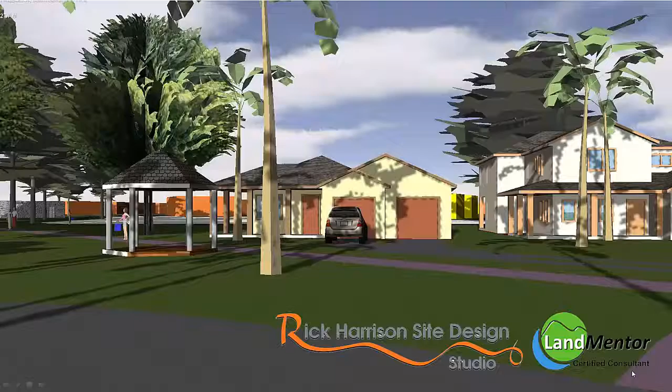In the next 20 minutes, we're going to introduce to you an entirely new way to look at residential land development called Prefurbia. When we look at sustainable development, we look at economics, how we can raise value, lower construction costs, lower ongoing maintenance.

And then we look at the human factors. It's great if everybody could live in a gentrified, expensive neighborhood, but how can we create self-worth at the lower or middle income levels so that every time you come into your development you feel great about yourself?

And of course, reducing environmental impacts are important, but not at the expense of profitability, because if a developer goes broke trying to be environmentally responsible, it will not be repeated in the industry. And that's why over 20 years you see very little of it. A balanced approach is what will give sustainable growth.

So how do we accomplish that when the world is developed like this? We have to understand why the world is developed with almost no design sense. We can look at the zoning requirements. All we have is a set of minimums, and maybe we've thrown in a few of the maximums. So there's a set of rules, paint by numbers, on how we develop the land that we have today.

Meanwhile, the developer always gets the blame for the cookie-cutter development, and yet the developer never designs the site. It's the consultants who do this work by following the city's rules.

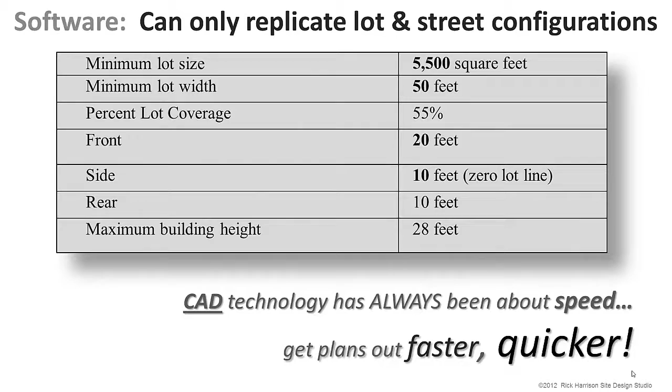So you got to ask yourself, with all this power today, why do we still design like this? Why do professional consultants who get paid heavily to design our neighborhoods still do work like this? And that's because they're using software that's been designed only about speed. It's been taking these minimums and how fast can we get that development out. Software has always been packaged and marketed to go faster, not better.

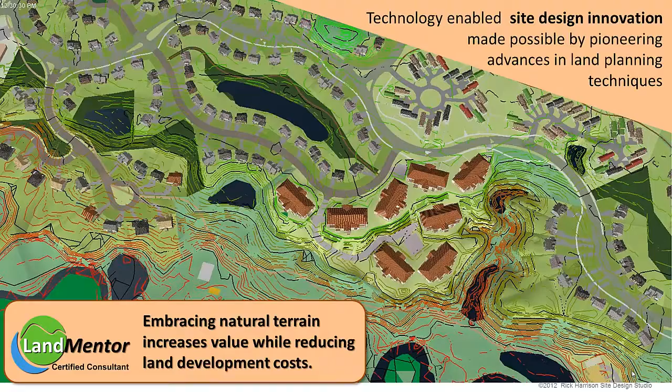Following a set of minimums encourages a tight grid. Natural terrain is never a tight grid. It's free form. So we've created a new era of design where we can embrace the natural terrain, create beautiful, wonderful neighborhoods that honor Mother Nature.

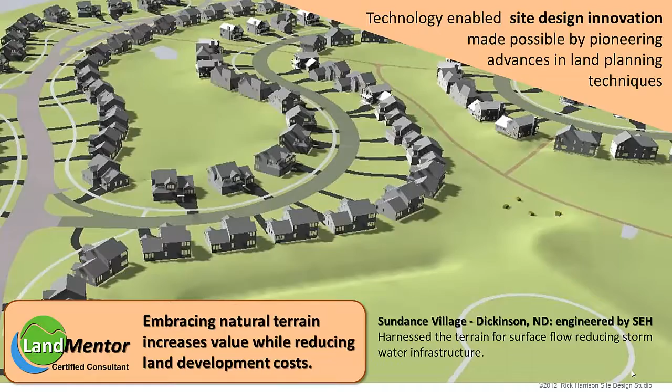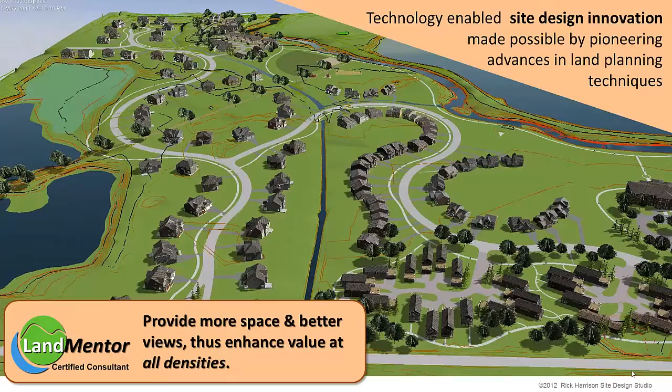Also, everybody wants a view, and hardly anybody wants to be packaged in a dense development. How do we provide a sense of space for everyone at every income so that every person feels important? Plus, what we represent on plan really should be exactly what was built. And that's rarely the case in land development.

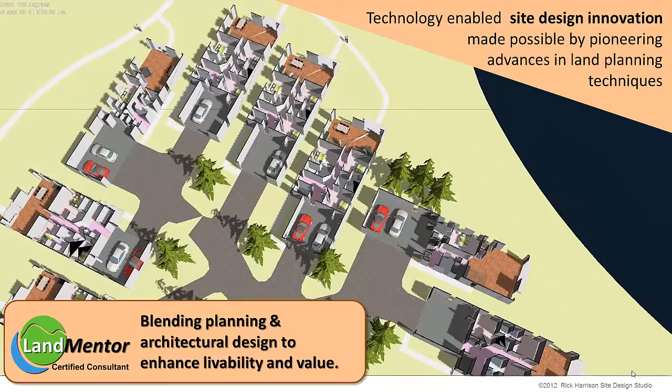An entirely new systems approach to how architecture relates to land planning is introduced in Prefurbia. This has a significant increase in value and livability that has not been duplicated before. It's a foundation for a new way to look at how homes, open space, and interior space relate to each other. And you'll see how that works soon.

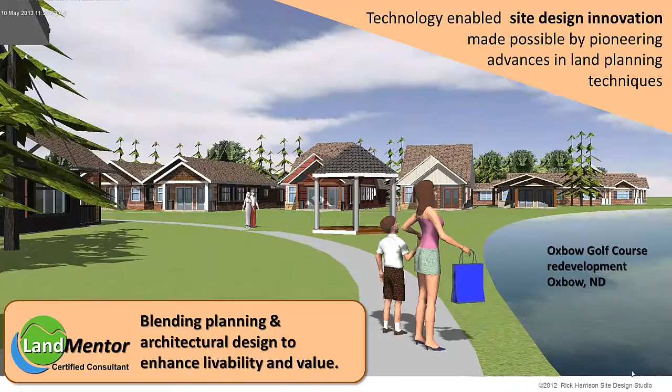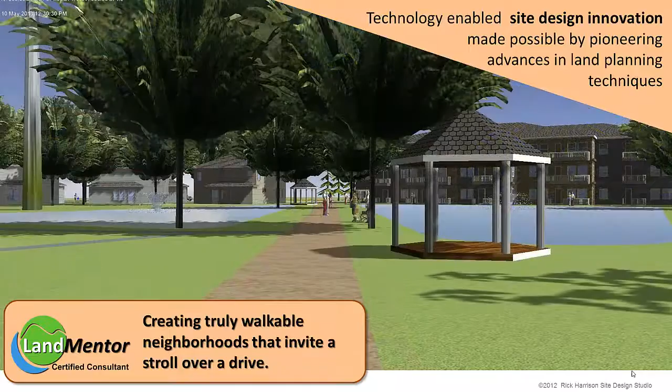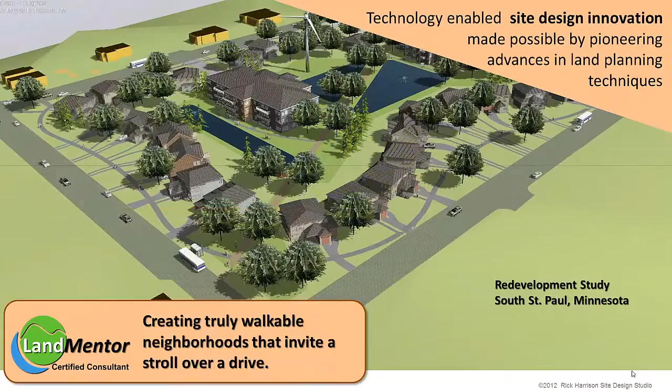Prefurbia also introduces new paradigms in walkability. In other words, we again look at a systems approach to create neighborhoods that invite a stroll over a drive. These systems can be used not just for new suburban development, but also, as shown here, urban redevelopment. Imagine neighborhoods that are so connected that you'll actually want to go out and make an experience for a stroll.

In Prefurbia, we've introduced vehicular flow. What does that mean? As you enter the neighborhood, we maintain a constant rate of speed, which significantly reduces both time and energy as one traverses the neighborhood.

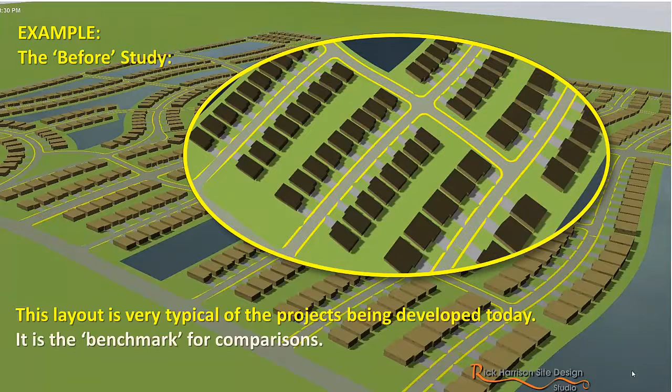Why should developers care about sustainable growth? Let's just take a look at one home in this 100 lot phase 1. The streets and lots will set a standard for centuries, even though homes might get remodeled. Average family is 3.5 people. So when we take a look at, say, 2 centuries, this 100 lot phase will affect almost 12,000 people. And yet, with all of our technology, this is what's very commonplace design in development throughout the U.S.

A grid development is wrongly thought to be pedestrian friendly. In this case, this gridded development, you have to get to that corner.

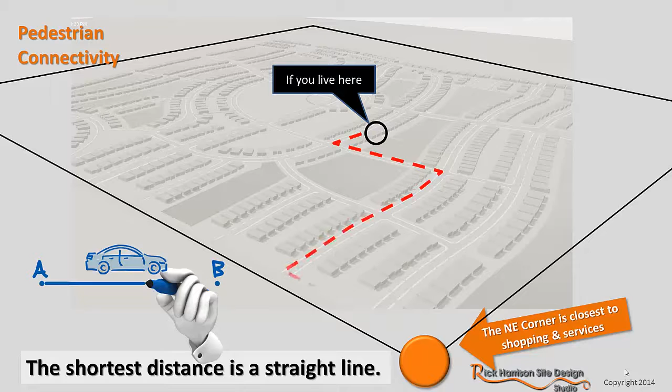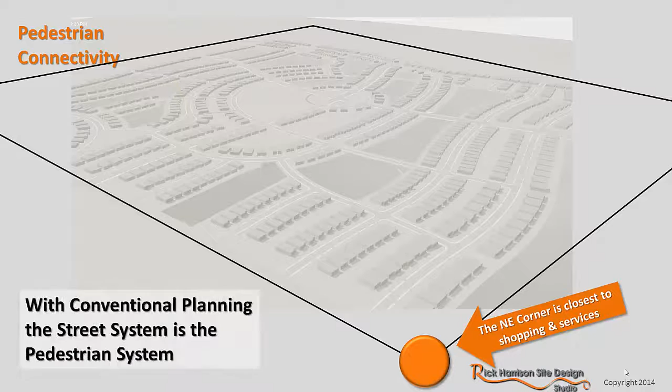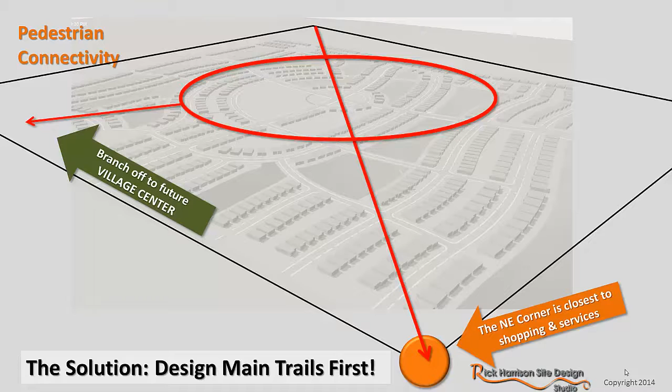So for most people, the grid provides the longest, not the shortest distance to get to your destination. Again, in Prefurbia, we use a systems approach. Instead of having the street system be the pedestrian system, we look for the destinations and design the pedestrian system first. The main trails come first in Prefurbia, and then we design around it—a much more logical approach to planning if we're going to create pedestrian-friendly neighborhoods.

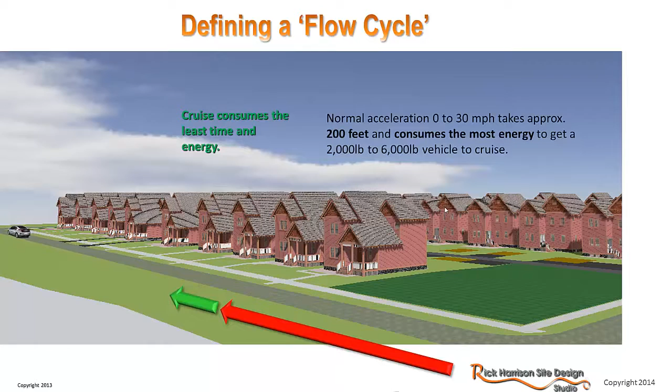Traffic engineering's done a great job on arterial streets and highways, but what about local streets? We started researching how much time and energy it actually takes a vehicle to get to residential speeds. It's 200 feet to get a car to that normal residential speed, where you're very efficient in time and energy, but then you're going to have to eventually come to a stop—that's another 200 feet. So a flow cycle is a minimum of 400 feet.

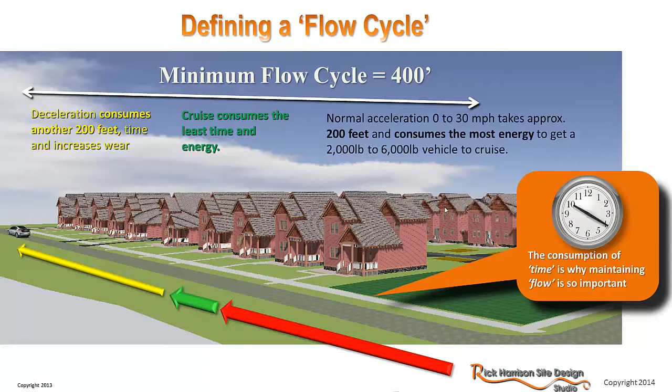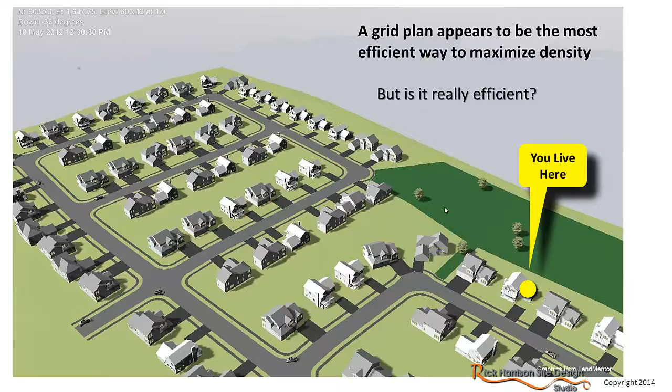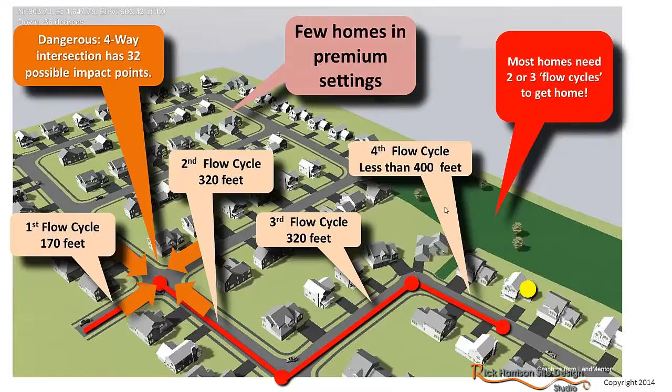This has a significant impact on both time and energy while in a neighborhood. To further demonstrate why this is important for every development being built, let's look at this development that was approved in 2010. It's assumed that the grid is very efficient. However, if you live in most of the homes in this neighborhood, you cannot turn a corner at 30 miles an hour, or even 25 miles an hour. It's in fact incredibly inefficient in both time and energy, and yet this plan provides very few premium settings for the builders and developers.

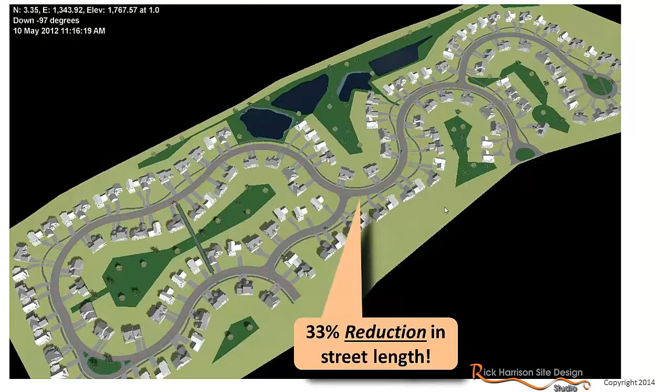As we redesign the same neighborhood, we're looking for one main street to define the neighborhood that maintains flow. There's a significant reduction in average time and energy that goes through this development compared to all other forms of planning. Perhaps just as, if not more important than the time and energy savings, is the fact that we've been able to reduce the street length by 33% while increasing the home premiums—yet it's the same density.

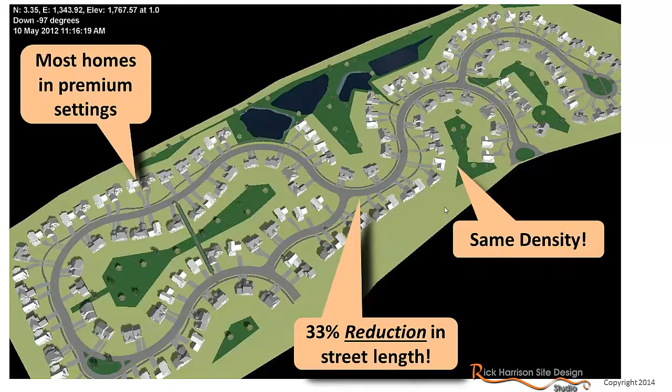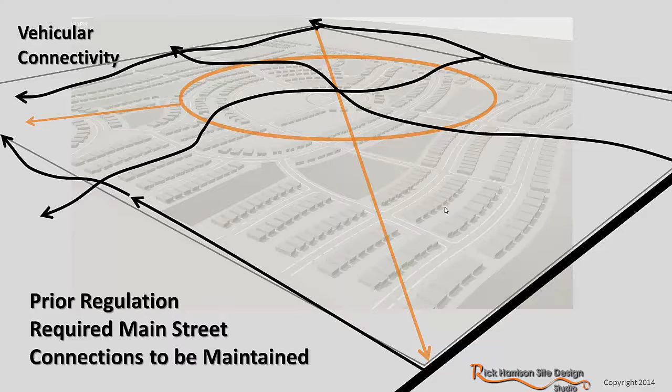So this is some of the things we're introducing that all tie together. Looking at the original grid plan, every one of those circles is a conflict point—not just for vehicles, but you're crossing pedestrians at every one of those intersections. The prior new urbanism regulations required us to bisect the neighborhood by having two main streets going through the design. This created 4 distinct separate neighborhoods.

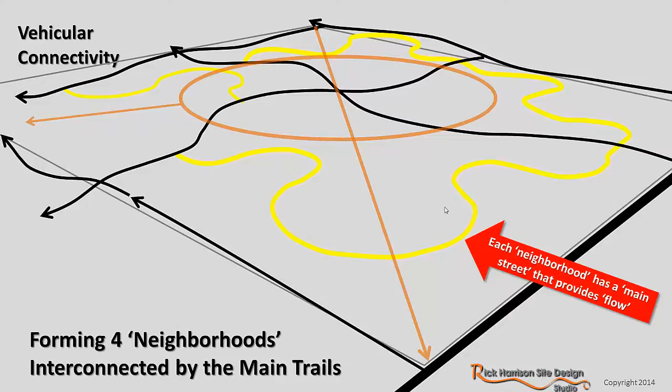However, the circular walk binds them all together. So with this concept of flow, once you enter one of these 4 neighborhoods, you maintain a good sense of flow. That is the foundation behind the planning of Prefurbia—that's how this plan and its logic have been developed. Those are big scale concepts. Now we're going to get into the fine details that we've been using on most of the 900 Prefurbia neighborhoods we've designed in the last 25 years.

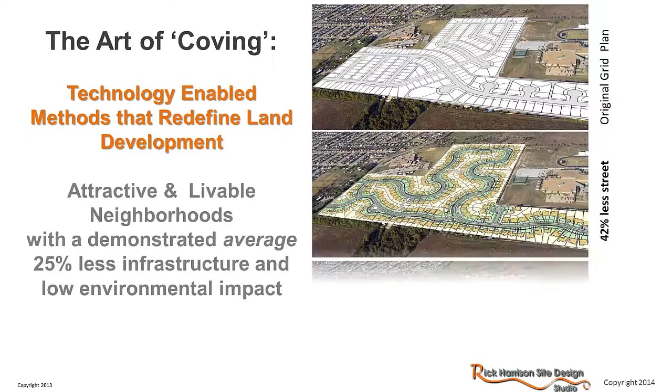We invented this technique called coving. Before coving, the engineer or surveyor laying out subdivisions would have to try and squeeze every lot into every little corner. Coving does something very unnatural—it pulls away from the boundaries. In this case, we're able to save 42% of the street and make 40% larger lots with 2 fewer lots, essentially the same density. And again, it's very important that what we represent on plan gets built identical to the way we're representing.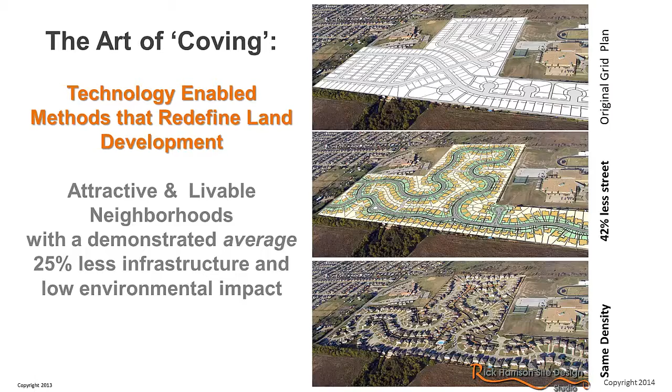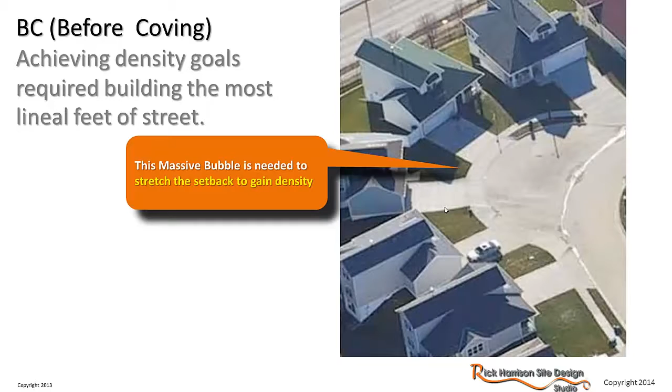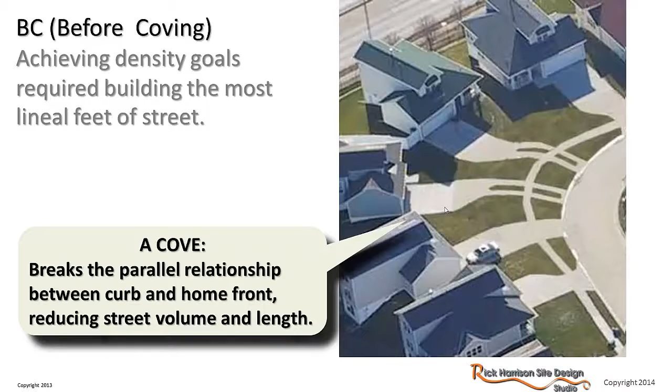A minimums approach is why those $40,000 bubbles are created. In order to stretch the setback line, you have to parallel that road because of the minimums. A 20-foot front yard minimum means we have to build that pavement, but the word minimum is key. We can go beyond the minimums, creating these little green open spaces—or large green open space in many cases—that we call a cove. That's the logic behind coving.

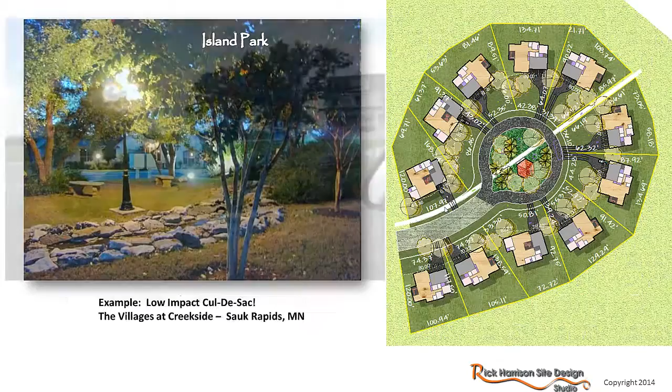Another example is in a cul-de-sac. Looking at a standard cul-de-sac on the left, the only logic is the fire engine radius. By going beyond every minimum, we double the amount of cul-de-sac lots, and yet it's the same density with far less pavement. So we've made a bad situation better. You can use that island we've gained in the middle for a park, or drain to the middle with one inlet and use it for your low impact design, your environmentally friendly cul-de-sac.

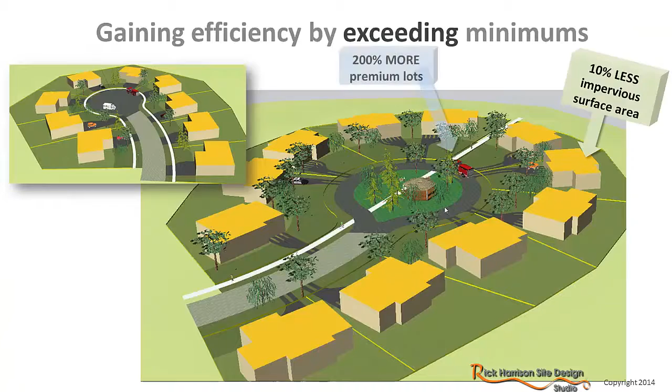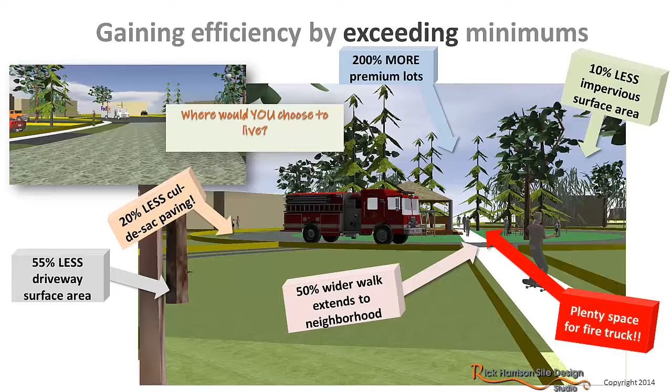And we could take the walk and extend it through the rest of the neighborhood so it's no longer closed. So what we've done is taking something that has a lot of negatives and turned it into a whole group of new positives. All we did was exceed the minimums, which is allowed by every ordinance. By breaking the rigid relationship of home and street, we can start sculpting our neighborhoods to create exciting developments.

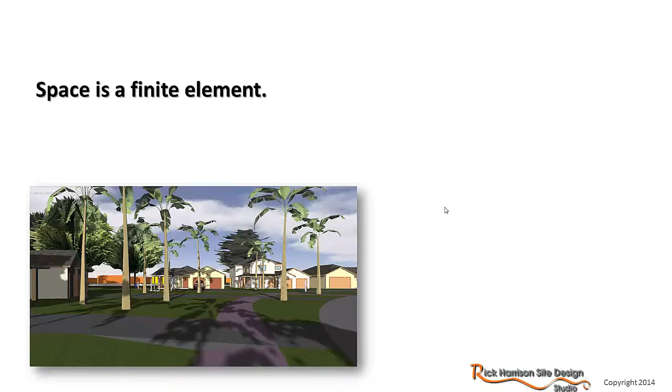There's only so much space we have, so the only way this can work is to significantly reduce the length of street. This significantly reduces the length of sewer mains.

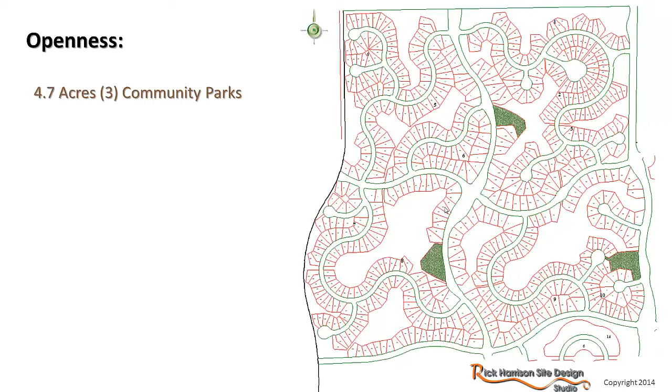Because of the coving and the variation in lot, the distribution of space is spread throughout the neighborhood. In this particular development, we kept the New Urban park distance from the average homes, but we've significantly increased the space, because the street itself becomes a park-like space, so everybody lives in the park.

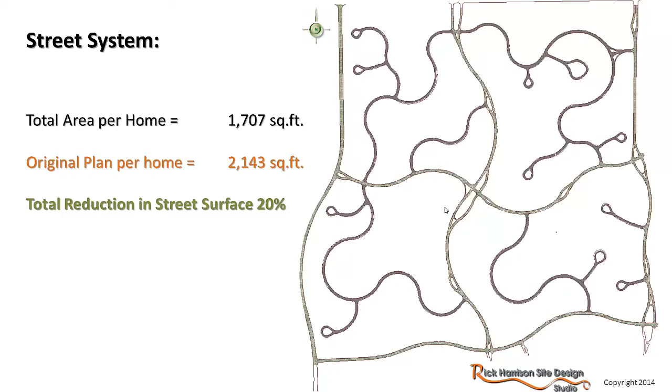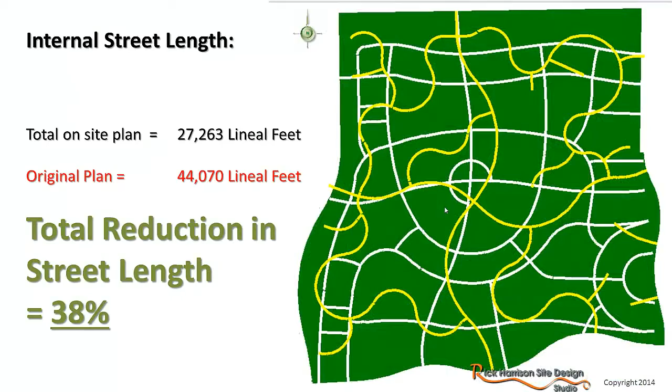Public streets are a main source of environmental impact, and yet compared to the plan before the grid, we have 20% less pavement, even though we've introduced diffusers, which we'll explain soon. The big thing is length of street. We have 38% less street length compared to the grid. At an average of $250 a linear foot per street, this is a significant reduction in construction cost.

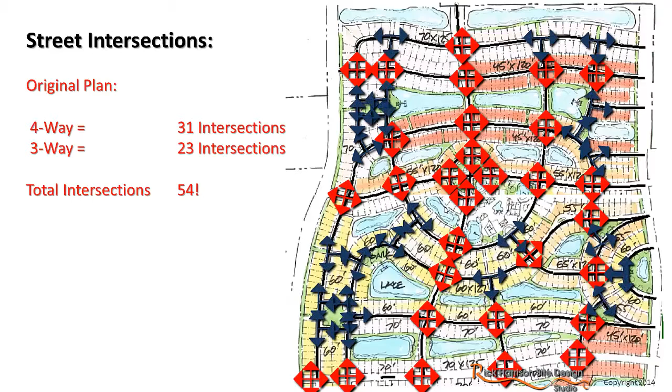Every four-way intersection is an accident waiting to happen. Three-ways are a little bit safer. The old plan had 54 intersections, again for pedestrian connectivity, supposedly. Our plan has 18 intersections, and they're mostly three-ways, mostly on the outside of the curve, so you don't have to crane your neck. Much safer neighborhood, much more efficient.

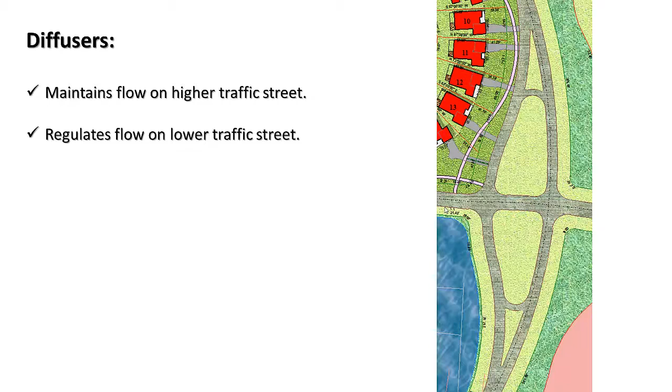What's a diffuser? Diffusers are a way to eliminate the need for traffic circles. They maintain flow on the main street, and yet they diffuse traffic. They're also a neighborhood identity, creating that all-important sense of place, especially in suburban design, which can be fairly mundane. They eliminate the need for traffic circles.

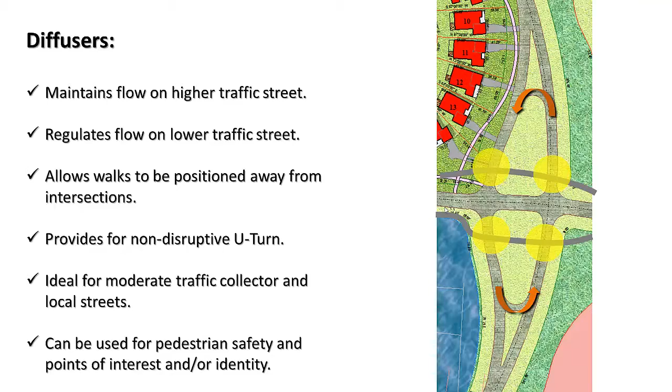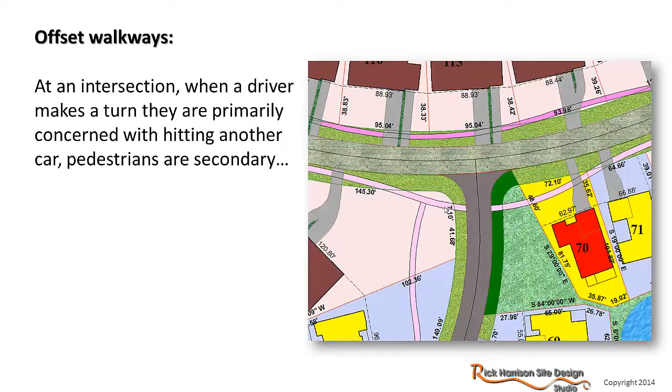Now let's talk about the pedestrian circulatory system, the fine details in Prefurbia. We meander all of our walks, and what that does is allow us to pull them away from the intersection to make it much safer when a pedestrian crosses the street, so we're not crossing where the cars are looking for other cars, not for pedestrians.

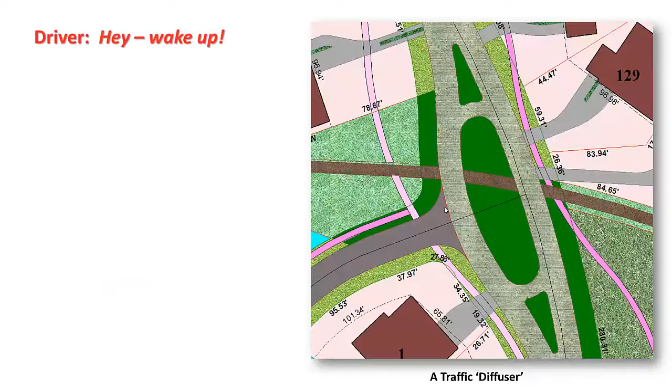Wherever there's a main trail crossing a street with traffic, we put diffusers. Nothing spells wake up more than an island in front of you as you're driving. Get off that cell phone and start looking for pedestrians. Pedestrians cross at one-way streets. Very, very safe. This is what a pedestrian diffuser would look like, for example, in this example of Viera, Florida.

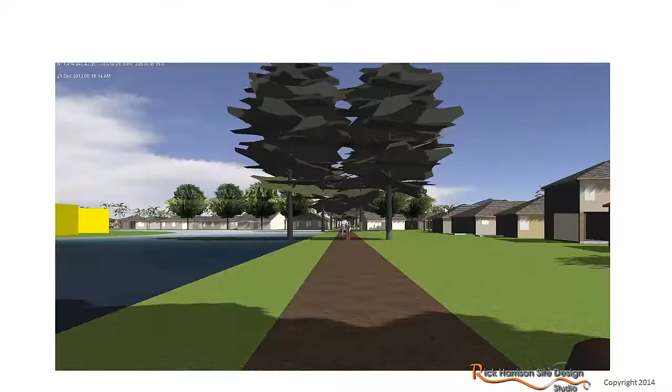The other thing we like to do is when the ground is flat, we like to put a main trail straight through the site. You plant little trees on each side. 10, 20 years later, it becomes a beautiful shaded architectural feature that lasts forever. These main trails are your main pedestrian highways. Once you get off the main trail onto your local streets, those beautiful meandering walks connect to it. An incredibly connective system. It's very important not to have a one-size-fits-all approach, because that does not work.

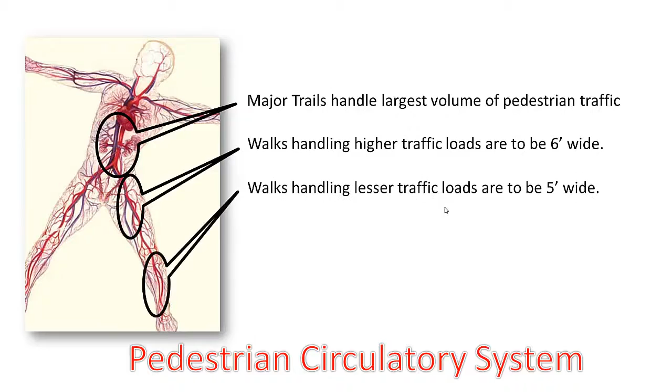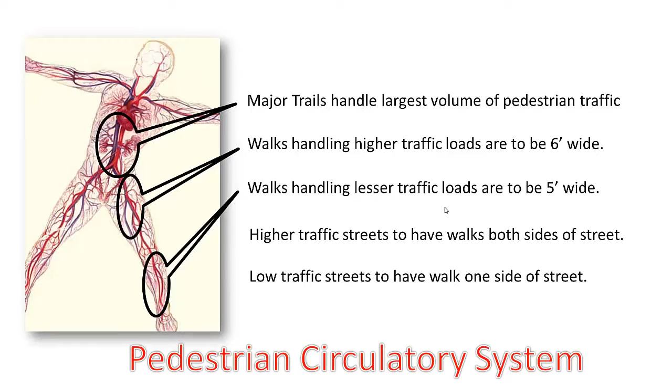They invite you out for a stroll. In these Prefurbia neighborhoods, the meandering walk gives another sense of scale. Those beautiful setbacks are more emphasized when the walk also meanders, so you have an ever-flowing streetscape. It also pulls the pedestrians away from the streets—we're not pushing them into traffic.

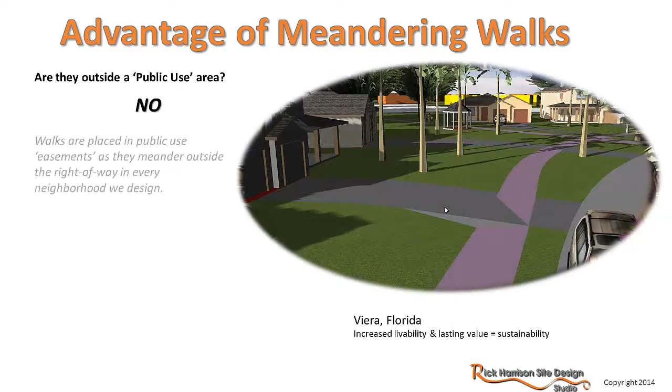So are they in a public use area? That's the big question we're always asked, because they go outside the right-of-way. They are not outside a public use area—they're inside one, because we typically write an easement from the edge of the walk to the street. That means we could duplicate that area to also put utilities, which can plummet the amount of utility bends and manholes within a freeform neighborhood, reducing costs even further.

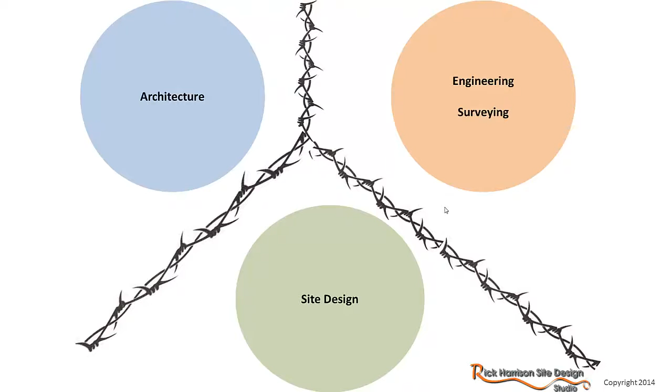Without an industry change, sustainability is a fantasy. Surveyors, engineers, architects, and planners never communicate during the most important design phase, the initial planning process. In order to create a sustainable world, we have to tear down these barriers which prevent us from moving forward. We'll introduce to you now how architecturally integrated planning can bring about a new era of sustainable neighborhood design.

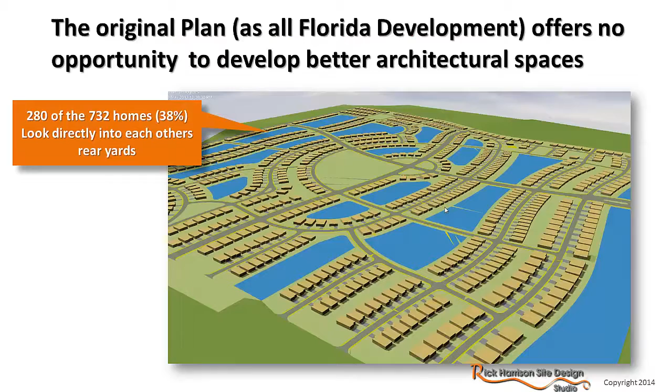On the original plan, there's a tremendous amount of homes that look directly into each other's backyards. In the new plan, while we still have homes that look into each other's backyards, they're reduced by a third.

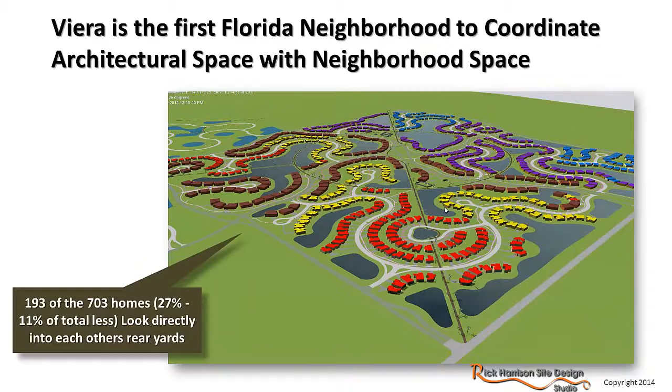When we start looking at architecture in this freeform planning, the view sheds, the views out the windows front to front, because of the angles, are significantly greater than any other form of planning. This attention to architectural detail allows us to increase not just the front-to-front views, but the rear-to-rear views, and then we introduce a new view around the corner of the home to get panoramic views along the edges.

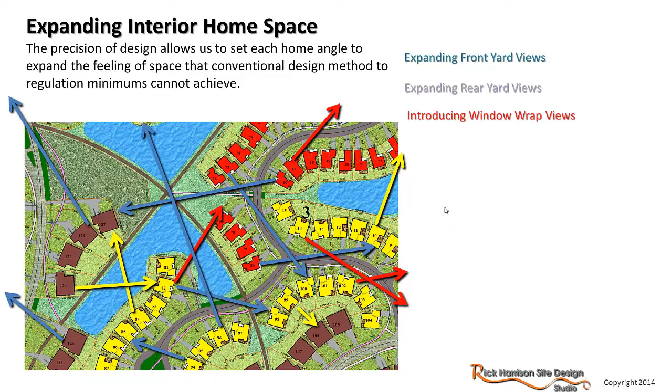So instead of having a plan A on these lots that you choose, so disconnected, we start looking at how we can integrate the interior spaces of the home, the living areas where we spend our time, and coordinate that with the open space around that home. With that, we create an entirely new way to enhance livability.

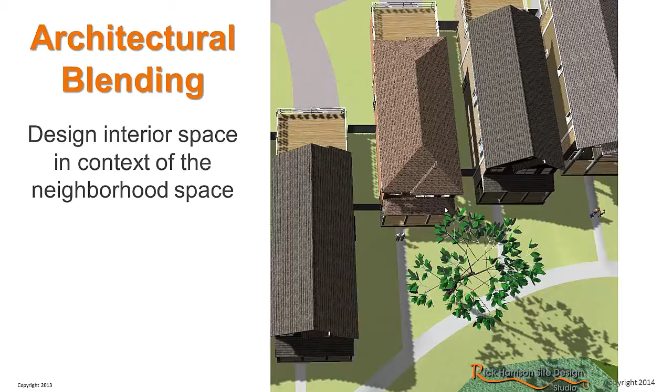Our first integrated product was a bay home. Instead of looking at a house as a rooftop or a building pad, we start looking at the functionality within the home. These are zero-lot bay homes that allow a private side yard, and they're a replacement for townhomes and duplexes.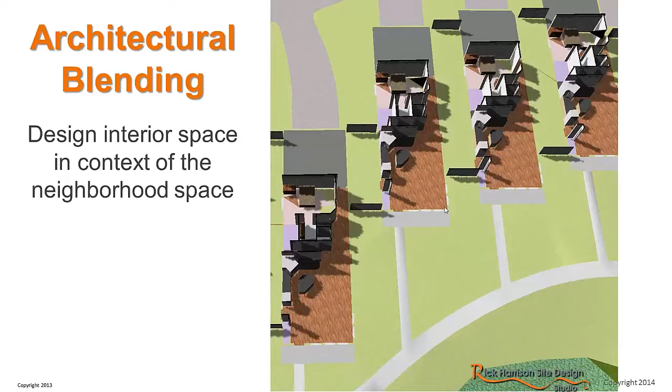So the interior room functions are very important. People hang around the kitchens. Where's our windows? Can we get a panoramic view so that you're not looking at the neighbor? It breaks up the architecture. It's the first concept that we brought to the market that integrated interior space and neighborhood space.

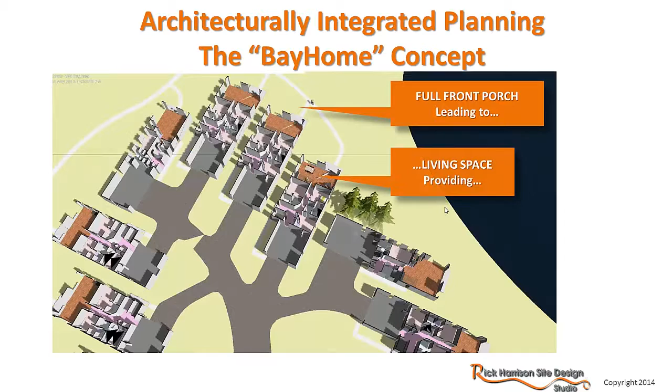It's very much a systems approach, just like everything else we're introducing. The walk leads to the living area. To get the panoramic views, we have to have a good amount of staggering, which eliminates this alley look.

We're using townhome standards for the drives, not alley standards, so they're a little bit wider, a little bit more functional. We can get 2 and 3 car garages easily within these homes, yet have a good sense of density and a good sense of open space.

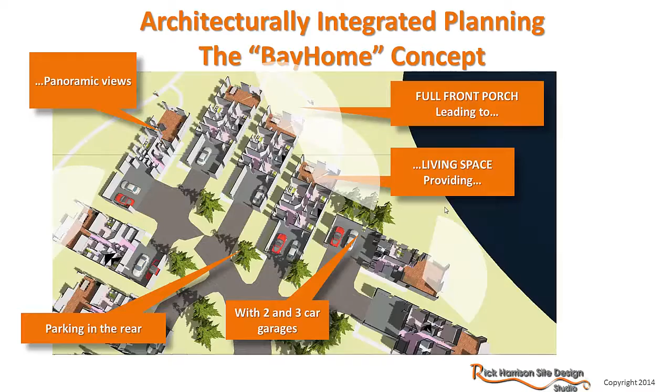From its introduction in 1999 to the beginning of the recession, bay homes were phenomenally successful, planning tens of thousands of them in developments. Most developments had bay homes for their advantages in the marketplace, a systems approach. But then we started thinking, this is so successful, why aren't we doing this for every single unit, multifamily and single family?

In the pursuit of density, single family homes become narrow and deep. In other words, less livable.

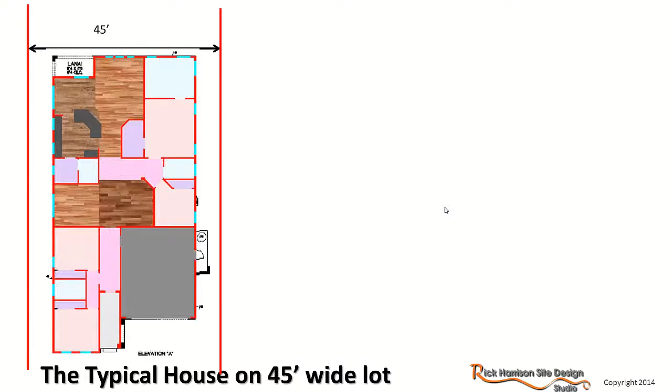There are several problems. One is that the home itself, once we start analyzing it in LandMentor software and analyzing the spaces, we can see 8% of the home is hallway. On a $200,000 home, that means $16,000 of the home is in space that's not usable—$16,000 thrown away in space just to get to room functions within the home.

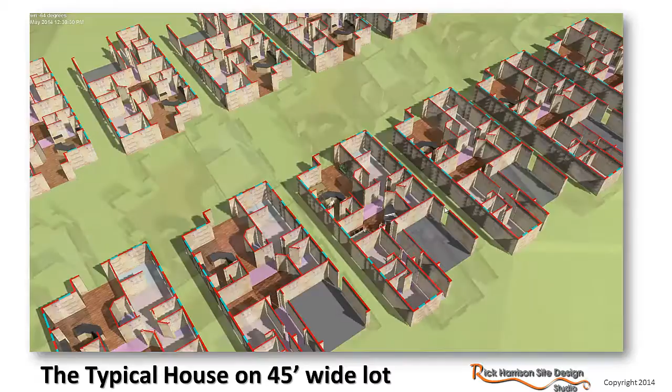But more seriously, on a grid, this narrow deep home has almost no connection to the street front. It's a door and a garage.

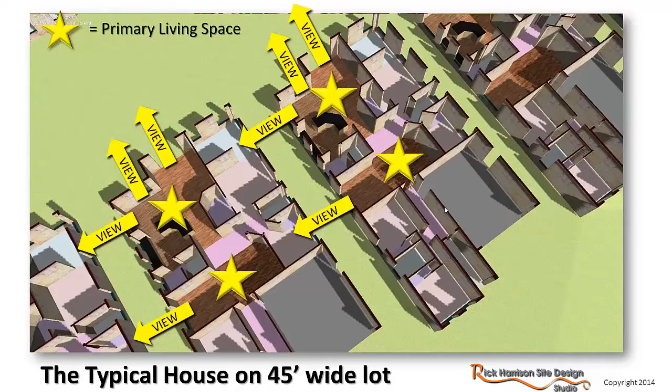When we look at living spaces, they literally look into the bedrooms of the neighbors or right into the other homes just 40 feet away, rear to rear on that grid. So how can we take advantage of the shapes of the lots that we're creating?

So we have to look at window space. The perimeter of a narrow, deep home allows very little viewable area. In this case, as we analyze the home, if that entire viewable area was glass front and rear, it's only 22% of the homes.

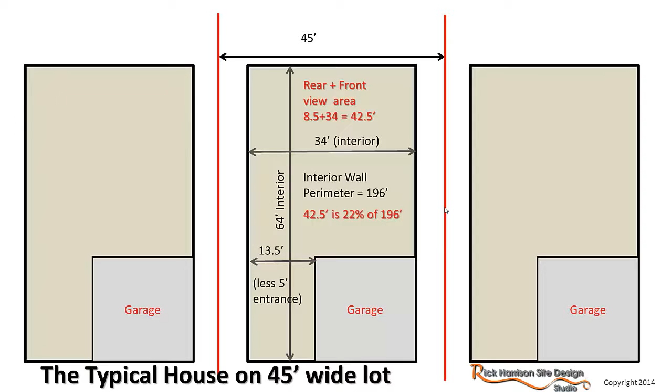But cove lots are not rectangular. By integrating architecture and planning at the initial design stages, we create a plan that enhances livability and value at the most important group, which is the mass housing market.

The most affordable units enhancing the living standards of the greater population. The importance of architecture is elevated because it's no longer just a facade and front porch. It goes far beyond that. Of course, the front porch is important for that streetscape, but we start adding functionality that's never been done before.

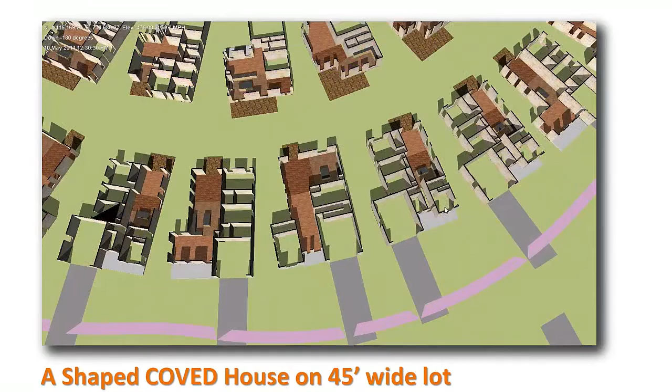So now let's take a look at that same home on a coved 45-foot wide lot. What we've got is we've introduced full front porches. The garage is no longer the dominant feature. We have panoramic views along most of the homes because of the angle relationships in the inside pie lots.

And as we enter the homes, on most of the homes, the space expands. That did not happen before. So we create this extra functionality.

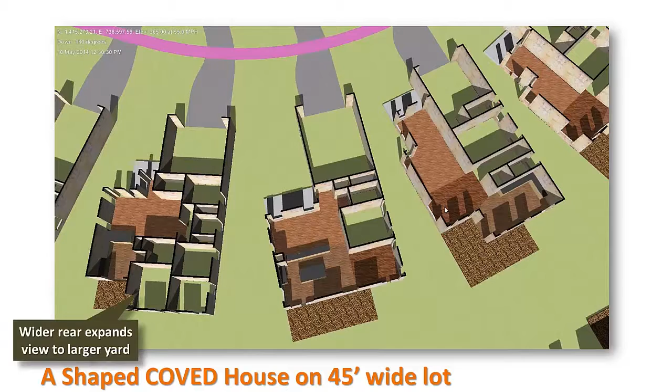On the outside pie, the home's wider in the back. Same benefits: we can introduce panoramic views around the edges, get space to expand where the yard is larger in the back, and we can get this more sense of space as we enter the home.

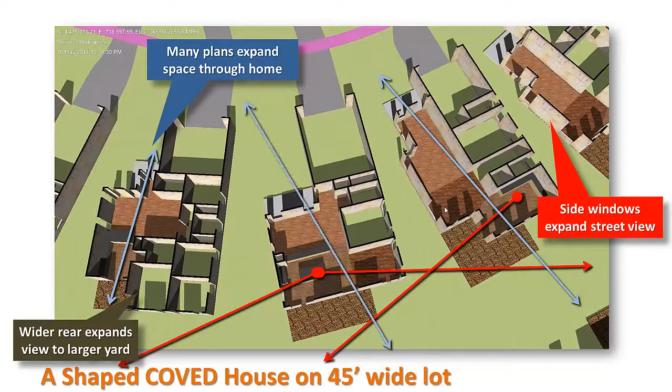And of course, a wider home is easier to plan without excessive hallway spaces. So now we've got 1/4 of the hallway space, 1/4 of the wasted space that we would have otherwise had to heat and cool. And so less energy use, maximum gain, maximum value.

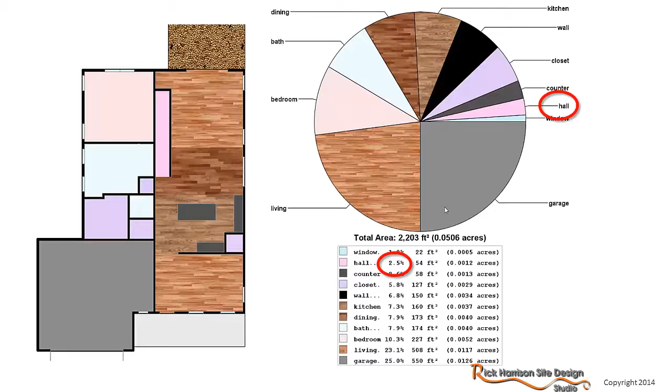Now, of course, there's a lot more to this new era of design than we're able to show you in just 20 minutes with these little snippets. But essentially, think of it this way.

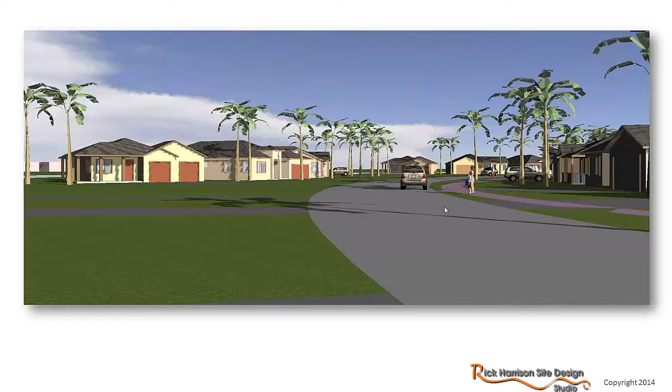This is the transition that we offer, going from conventional design or new urbanism to Prefurbia. Of course, as a single small planning firm, we can't change the world, but we can change the industry. For three decades, CAD has been stagnating planning, surveying, and engineering.

So how can we go beyond CAD? We've created a system that others can use, the first intelligent spatial technology that comes with a complete education on how to replicate the advantages that we've created.

Again, as we alluded in the beginning of this presentation, the entire consulting industry has been shackled into this mindset that we've got to replicate development out the door as fast as possible. The industry itself has forgotten the importance of creating neighborhood. Instead, they create geometry. They create math.

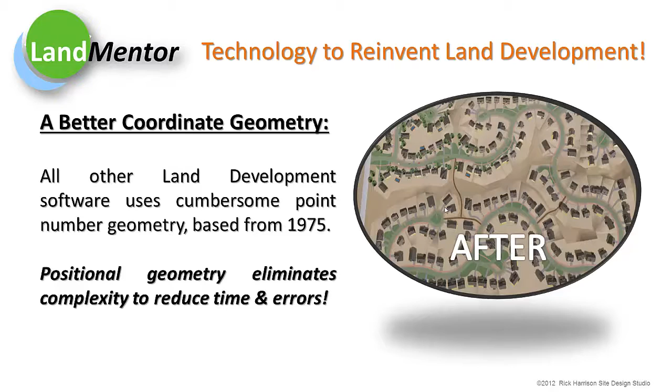We've got a better coordinate geometry. We've got better technology. People don't understand a 2D plan. They can't visualize it, and yet we build the world based on that, and 3D has not been used because it's far too difficult.

So we've created the first simple to use and harness 3D virtualization using video gaming technology. So we can take and get a plan out and not just give a 2D plan, but give a video experience free to our customers, and have that capability go to any consultant embracing the system.

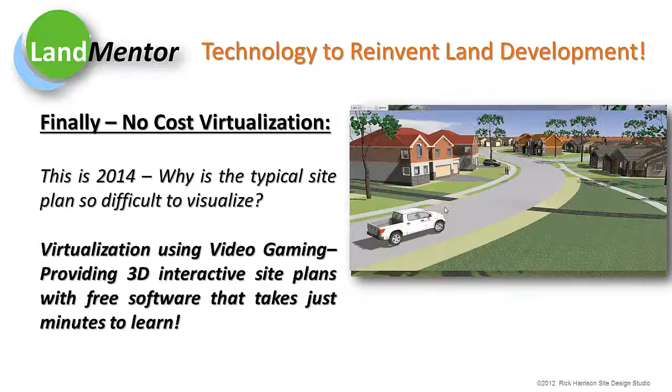So the question remains: are we available to plan your sites, or will the consulting industry start embracing a new way, investing the time, money, manpower, and energy to learn to do a better job for their clients—the developers, the builders, the municipalities, ultimately the consumers, you living in these neighborhoods.

The land plan is the developer's business plan. It's the foundation of the market advantage for the builders that they sell to. One thing for certain, I certainly wouldn't want to be the builder or developer that has to compete against one of these developments down the street.